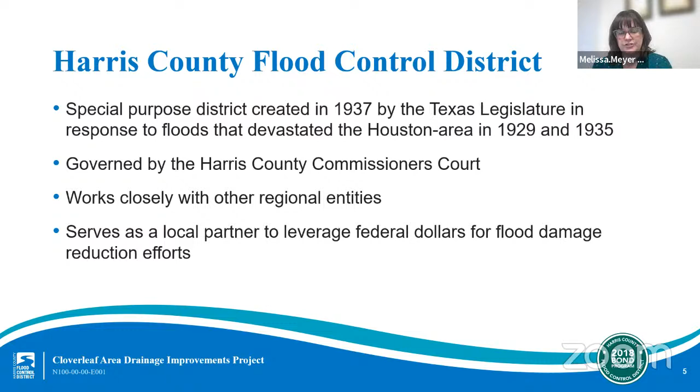The mission of the Harris County Flood Control District is to provide flood damage reduction projects that work with appropriate regard for community and natural values. One of the most difficult challenges we face is constructing effective projects that are sensitive to community and natural values in highly urbanized areas.

Harris County includes 23 main watersheds, each totaling approximately 1,800 square miles, with more than 2,500 linear miles of channel combined—approximately the distance from New York to California. A watershed is a geographical region of land that drains to a common channel or outlet, and each watershed has its own unique characteristics and needs. The project we are presenting on tonight is in the Carpenter's Bayou watershed, located in the eastern part of Harris County.

Harris County and our surrounding area is flood prone for a number of reasons. Namely, we experience extreme rainfall events, including tropical storms and hurricanes. Our area is largely made up of flat, slow draining lands, and we see large concentrations of clay soils that do not soak up excess rainfall quickly.

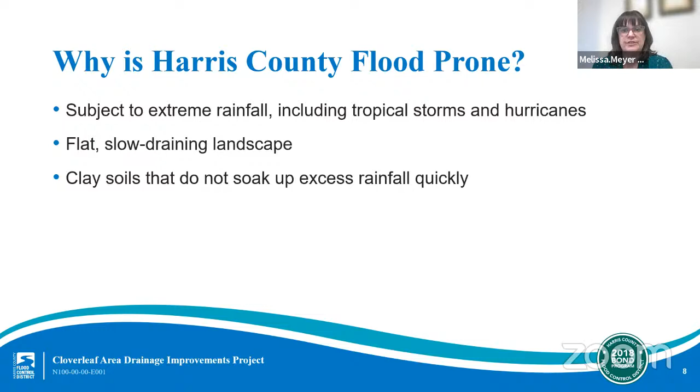While the Flood Control District plays a critical role in flood risk reduction, we are one of several entities involved in these efforts in our region. When rain falls on your roof, it flows through several jurisdictions, such as streets and drains managed by the Harris County Engineering Department, a municipal utility district, or a city such as the City of Houston, before it flows into a larger channel, creek, or bayou that the Flood Control District owns and maintains. This slide illustrates the various jurisdictions, which sometimes we even share with other entities.

Inside neighborhoods, as shown on the left side of this illustration, storm sewers and roadside ditches collect stormwater runoff and start the process of moving it away from homes and streets. Storm sewers and roadside ditches are usually the responsibility of the local municipality. The project we are presenting on tonight, however, does blur these jurisdictional lines, as a flood control district typically does not design projects for local drainage improvements. The larger bayous and channels that take the collected stormwater and move it through our drainage system to Galveston Bay are the responsibility of the Flood Control District, shown on the right side of the illustration.

In the middle is a stormwater detention basin, sometimes constructed by the Flood Control District. When storm sewers on the left are increased, this creates an increase in runoff. Since it's our policy to avoid any adverse impacts from our projects, detention basins help to safely take in and temporarily store excess stormwater during heavy rain events. Often we partner with Harris County precincts, utility districts, and others to add recreational amenities such as trails to these basins and along our channels.

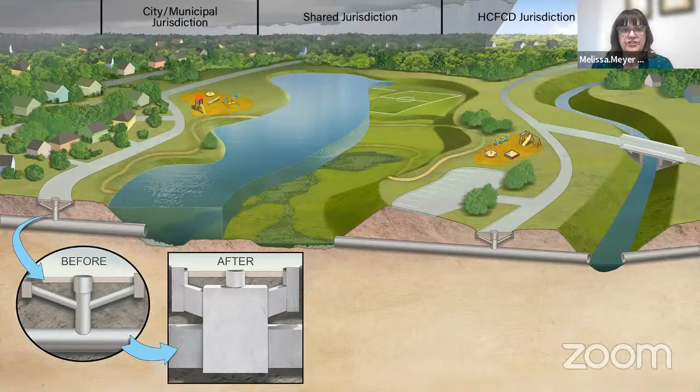On August 25th, 2018, Harris County voters approved $2.5 billion in bonds for flood risk reduction projects. This vote followed a series of 23 meetings with community members across Harris County, one per watershed, which resulted in a list of what is now 181 bond projects. 38 of those projects were added directly as a result of community input.

The actual timing of each individual project will depend on a variety of factors, including environmental permitting, right-of-way acquisition, and utility relocation, and in some cases, requirements of a particular grant. Project lists and projected schedules are updated regularly on our website.

As projects move forward, we're making significant progress towards resilience in Harris County. We shared an update with Harris County Commissioners Court in January of this year, and we highlighted a few notable stats. We've completed or closed 27 projects. We've secured $1.43 billion in partnership funding to stretch the bond funds even further for our community, and we've hosted more than 180 community engagement meetings. Your input is critical to our efforts, and we want to ensure our conversations continue. We'll continue these biannual updates moving forward to share progress on the program.

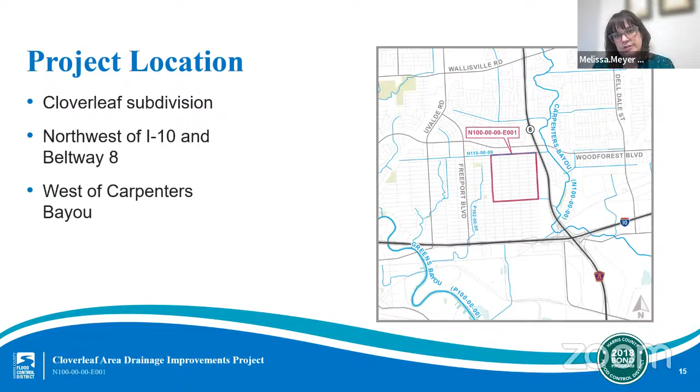Now let's take a look at the location of this flood risk reduction project. The Cloverleaf Area Drainage Improvements Project is located in the northern portion of the Cloverleaf subdivision in the Carpenters Bayou watershed. The neighborhood is located northwest of the intersection of Interstate 10 with Beltway 8, just west of Carpenter's Bayou. The Flood Control District formally identifies Carpenter's Bayou as Unit N100-00-00. The bayou flows under the Beltway before turning back to the east, where it eventually drains into the Houston Ship Channel.

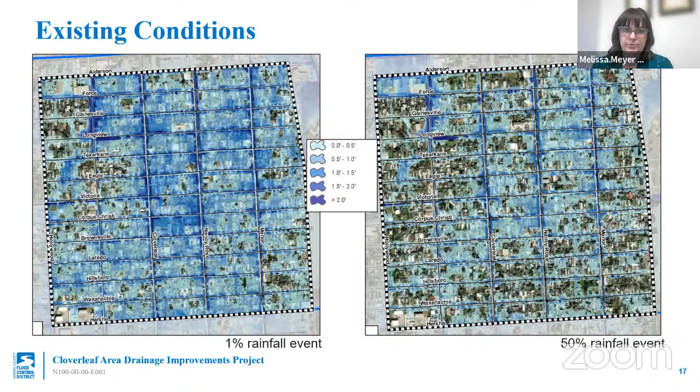We talked about how stormwater flows within the project area and why the area has an increased flood risk. The map on the left shows existing conditions for 1% rainfall events. In that size of a rainfall event, which is 18 inches in 24 hours, it is modeled that there would be 205 acres of inundation with 209 flooded structures and 7.4 miles of flooded roadway. The map on the right shows existing conditions for 50% rainfall events. In that size of a rain event, which is 5.3 inches in 24 hours, it is modeled that there would be 137 acres of inundation with 44 flooded structures and 3.2 miles of flooded roadway.

We've been working on a plan to help reduce the risk of flooding in the Cloverleaf neighborhood. In this presentation, I'll first tell you about the plan as a whole, and then I'll explain how the project is expected to be implemented in 2 phases.

The full Cloverleaf area drainage improvement project would improve some of the internal drainage systems and related infrastructure that conveys stormwater from the Cloverleaf subdivision to Carpenter's Bayou. To do that, certain roadside ditches and driveway culverts in the neighborhood will be desilted, regraded, and/or resized to increase their capacity to carry stormwater out of the neighborhood.

In addition to the improvements to the neighborhood ditches, the full project includes the construction of an underground drainage culvert designed to convey stormwater out of the neighborhood. Inlets within the ditches along the location of the box culvert would capture stormwater runoff from the Cloverleaf area and convey it more quickly out of the neighborhood.

Improvements to the roadside drainage ditches ultimately will be made in the northern part of the neighborhood, within the area bounded by Alderson Street to the north, Hershe Street to the south, Hollywood Street to the west, and Sam Houston Tollway to the east. The proposed recommendation for improving drainage conditions within Cloverleaf involves the rehabilitation and subsequent improvement of Nancy Rose Street as a primary drainage corridor.

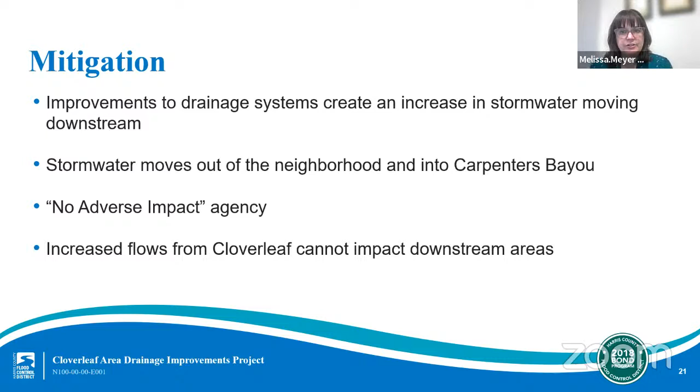To offset the impact of drainage improvements and increased flows, we need to mitigate for the improvements. One way to provide mitigation for drainage improvements is to build a stormwater detention basin, which provides temporary storage for excess stormwater during heavy rain events.

When the stormwater levels within the channels recede, the stored stormwater in the detention basin drains back into the channel by gravity via outfall pipes appropriately sized to drain the basin safely.

When we talk about stormwater detention basins, we talk about how much stormwater they can hold in a unit of measure called acre feet. That measure refers to the volume of 1 foot deep over 1 acre. For context, 1 acre foot equals 325,851 gallons. Think of 1 football field covered with 1 foot of water.

To mitigate for the drainage improvements in this project, a stormwater detention basin with a minimum storage capacity of 113 acre feet would be required to avoid impacts of the increased flow into Carpenter's Bayou. Property acquisition would therefore be required in order to build a stormwater detention basin large enough to mitigate for the local drainage improvements.

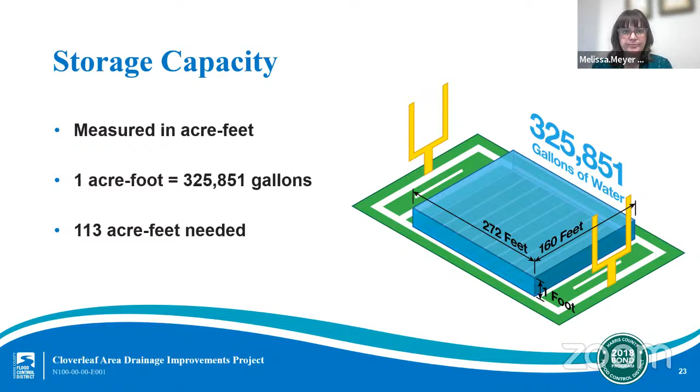Stormwater detention basins are the flood control district's typical approach to mitigation. However, in some instances where land is not available to the flood control district to construct a stormwater detention basin of an appropriate size, engineers consider alternative mitigation options. At this time, engineers are still in the process of determining a viable and appropriate mitigation option for this drainage improvements project.

I mentioned earlier that this project is expected to be completed in 2 phases, and that's partly due to the timing needed to continue investigation into mitigation and potentially for property acquisition if a stormwater detention basin is to be constructed. With the phased approach, drainage work on some of the streets in the area can be done simultaneously with the property acquisition process or further mitigation analysis. The plan would be for the drainage work on the remaining streets in the project area to be done after the construction of the stormwater detention basin or identification of other appropriate mitigation.

The project team conducted a hydraulics and hydrology analysis to determine which roadside ditches and driveway culverts in the neighborhood can be desilted, regraded, and/or resized without creating an adverse impact. By adverse impact, we mean moving the problem elsewhere or making an issue worse elsewhere. That is, what drainage work can be done without the mitigation element in place.

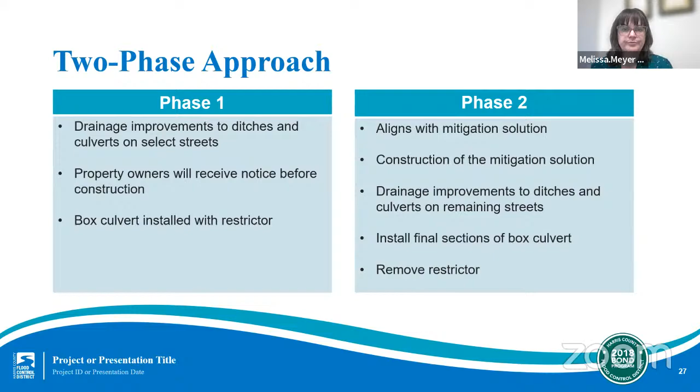Here are the expected benefits by the numbers. For the 1% rainfall event, which is 18 inches in 24 hours, it is modeled that there would be 186 acres of inundation, a reduction of 19 acres; 134 flooded structures, a reduction of 75 structures; and 6.08 miles of flooded roadway, a reduction of 1.32 miles of roadway inundation.

For the 50% rainfall event, which is 5.3 inches in 24 hours, it is modeled that there would be 62 acres of inundation, a reduction of 75 acres; 3 flooded structures, a reduction of 41 structures; and 0.57 miles of flooded roadway, a reduction of 2.63 miles of roadway inundation.

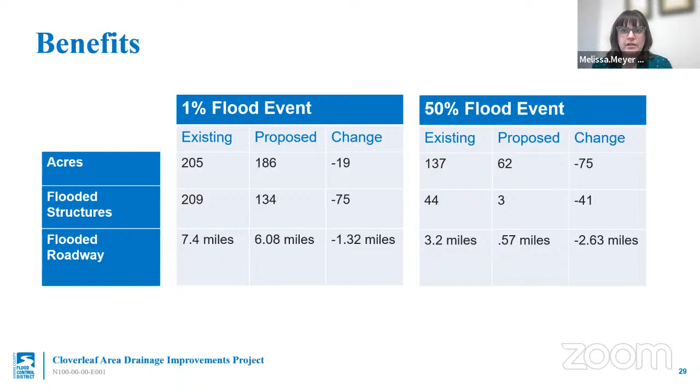So what's next? As we've stated, property acquisition in support of this project could be necessary. However, home buyouts are not a consideration at this time. The project went to bid in late March, and construction of phase 1 is expected to begin in fall of 2023 and is expected to last about 12 months. As details of the construction plan become available, we'll share that information with the community, including details on timing, sequencing, and traffic control plans as appropriate. Phase 2 would be expected to begin after completion of analysis and determination of a mitigation solution.

The Community Development Block Grant funding requires the work to be complete in June of 2024. Therefore, we will complete as many of the components of the project as possible to adhere to this schedule. We'll continue to update the project webpage.

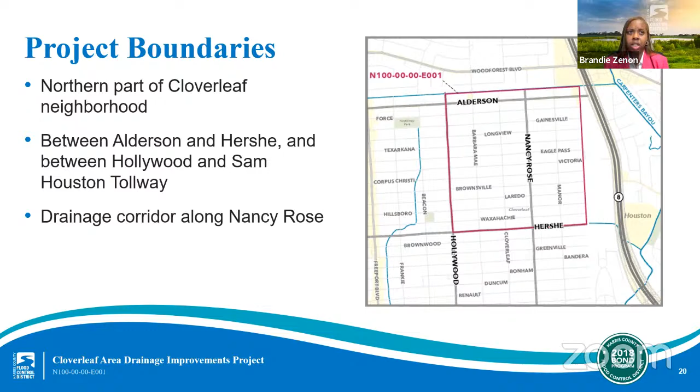The drainage in this area primarily consists of roadside ditches, roadway culverts, and driveway culverts. There are only a few storm sewers in the project area. The majority of the stormwater is collected and moves through the roadside ditches into Carpenter's Bayou. Over time, the capacity of these roadside ditches is reduced as they become overgrown and filled with silt and sediment.

In addition, older infrastructure was built in the 60s, 70s, and 80s, and was designed to the standards at that time. Over time, the intensity and duration of rainfall in our region has increased significantly in past decades. Aging infrastructure simply cannot accommodate the adequate drainage that's needed for this neighborhood.

Thank you, Brandie. Melissa, we have an education opportunity here. Can you please define what sheet flow means? Sure. So due to the flat terrain in our region and the design of the older street networks, when there's an intense rainfall, older storm sewer systems may not contain all of the rainwater draining into them.

So rainfall not being contained in a storm sewer system may overflow into the streets. Streets sometimes serve as above-ground channels, which convey stormwater as it sheet flows to the nearby channels.

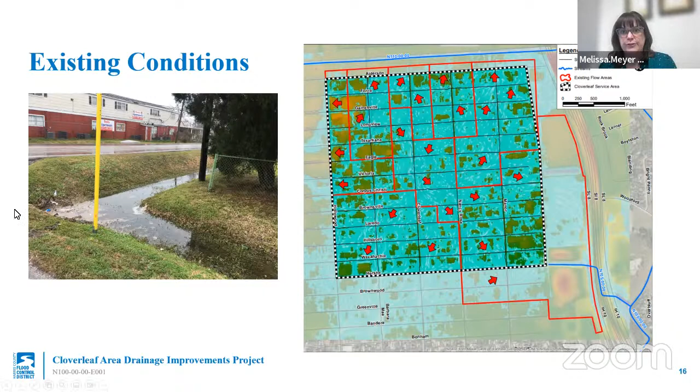As Brandie mentioned earlier, a lot of the existing aging infrastructure is filled with sediments, and so there's no way for the rain to go. Basically it just sheet flows to wherever it can get. That's the main issue out in this area that we're trying to solve.

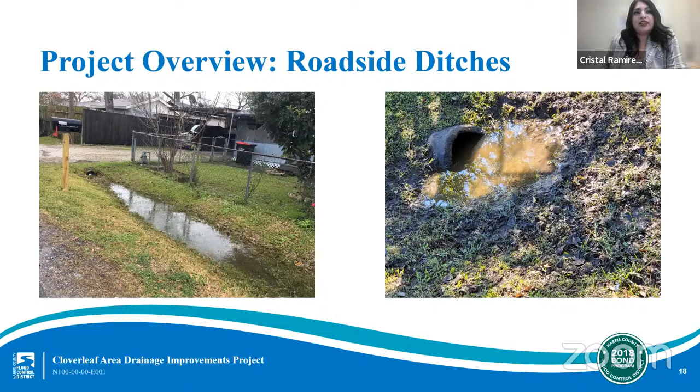Melissa, I know folks are curious about property acquisition. Will there be any property acquisition needed? So it's too soon to say until the investigation is complete. At this time, home buyouts are not a consideration. Property acquisition in support of this project could be necessary, and it'll depend on the identification of the most effective options for mitigation for the local drainage improvements. We'll know more about potential property acquisition during phase 2 of this project.

Thank you. Brandy, this is probably one of the most important questions viewers will have tonight. How will construction of the phase 1 drainage improvements impact residents? Good question. As with any construction project, there may be construction inconveniences within the area to the residents. Property owners will receive advance notice as to when the contractor or construction will begin within the area and which streets will be impacted.

At this time, it's too early to tell exactly what the details of the construction plan are. But once we have that information available, we will publish it and provide it to the community. This communication could include details on timing, sequencing, traffic control plans, and access to property as appropriate. Construction of the entire phase 1 is expected to last approximately 12 months, and we will implement a sequenced timeline, meaning interruption on an individual street will not occur the entire time.

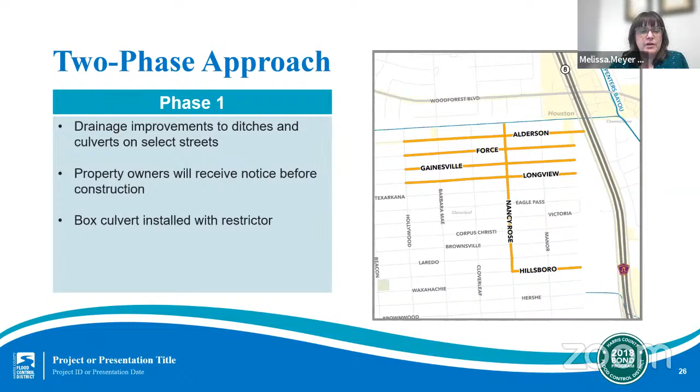Thank you, Brandie. Melissa, you mentioned that the box culvert constructed in phase 1 will have a restrictor in place. What is a restrictor? A restrictor simply limits the amount of stormwater that will be allowed to flow into the box culvert and then ultimately drain into Carpenter's Bayou. Because the project ultimately requires appropriate mitigation for increased flow into Carpenter's Bayou, we'll need to limit that flow until the mitigation is in place. We can't move more stormwater into Carpenter's Bayou than it can handle without creating an adverse impact downstream. Therefore, the capacity of the box culvert will be temporarily limited.

The box culvert will still be functional after the completion of phase 1 improvements and will still accept stormwater from the improved roadside drainage systems.

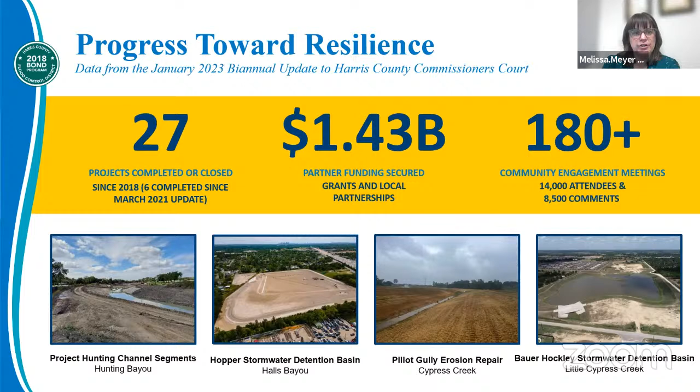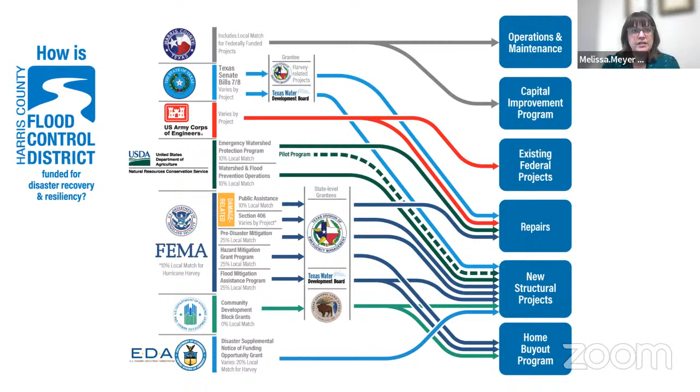Melissa, how is this project being funded? How much will it cost? This project is an example of partnership funding between the 2018 bond program, which funded the Carpenter's Bayou Watershed Planning Study, and the resulting 2021 Carpenter's Bayou Watershed Plan, and the U.S. Department of Housing and Urban Development Community Development Block Grant Mitigation Program, which awarded a $9.4 million grant for phase 1 of this project. Additional funding will be required for phase 2 of the project.

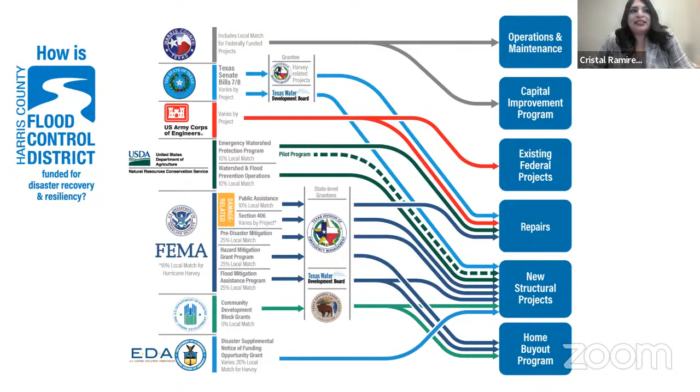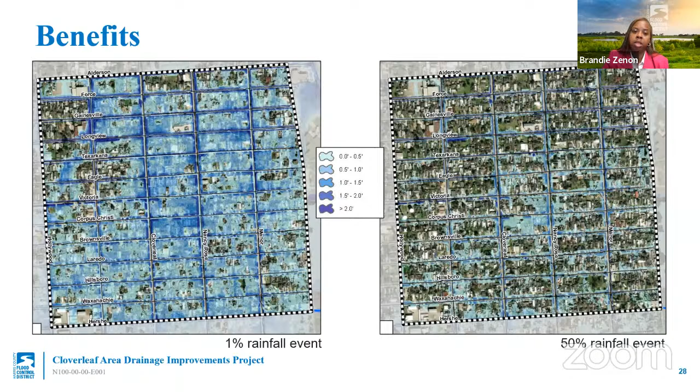Thank you, Melissa. Brandie, can you explain the benefits expected from the recommended improvements? Yes, after the completion of phase 1 of the project, we expect to see reductions in flooding and flooded structures in the phase 1 and 2 area. For the 1% rainfall event, where 18 inches of rainfall falls in 24 hours, we expect a reduction of 19 acres of inundation, 75 fewer flooded structures, as well as 1.32 miles of flooded roadway removed.

For the 50% rainfall event, where 5.3 inches of rain falls within 24 hours, we expect a reduction of 75 acres of inundation, 41 fewer flooded structures, and a reduction of flooding on 2.63 miles of roadway.

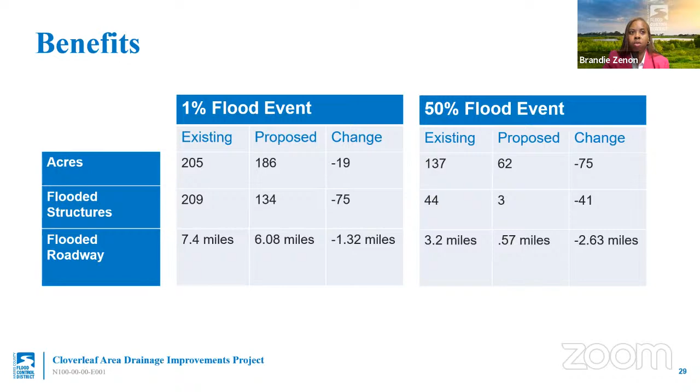Thank you. Again, I know many of you are curious about your impacts, Brandie. How can residents find out if their home will be included in the improvements? The streets included in phase 1 are Alderson Street, Force Street, Gainesville Street, Longview Street. We are doing improvements along Nancy Rose as well as Hillsboro. The impacted property owners will receive advance notice as to when construction will occur on their particular street, along with details of the timing, sequence, traffic control plans, and how they will be able to access their property.

Thank you. Brandie, this is also for you. Is this the first time the community has heard about this project?

Through the process required for the Community Development Block Grant MIT, or CDBG-MIT funding, a public meeting was held in the Carpenters Bayou watershed in 2020. Tonight's meeting is the first time we've specifically talked about the Cloverleaf Drainage Improvements Project. Until now, updated project information has been posted on our website, which we will continue to make available for the community to look at additional information about the project as needed.

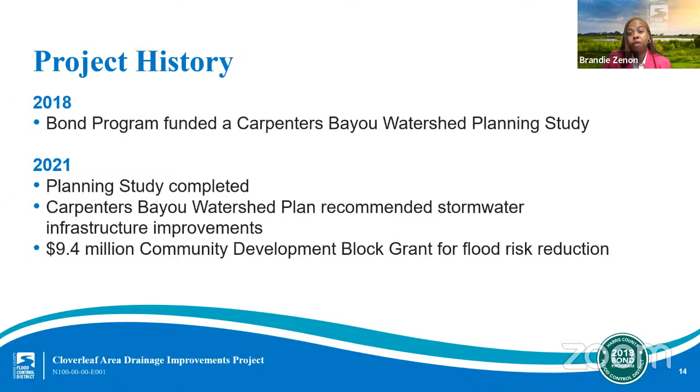Additionally, the Flood Control District always welcomes input on their projects. You can make that input at www.hcfcd.org/Cloverleaf. Just click submit a comment to ask a question or provide project input, and someone from our team will get back with you for a response.

Once the details for phase 2 are known, the Flood Control District will hold another community engagement meeting like this one to discuss the alternatives that were considered and what would be the recommended alternative to move forward for construction of phase 2. Thank you, Brandie.

I have another question for you, Brandie. What is the current stage of the project? For phase 1, we are currently entering into the construction phase. We just completed design earlier this year, and we're transitioning into the construction phase. For phase 2, we are kicking off the design phase for that part of the project.

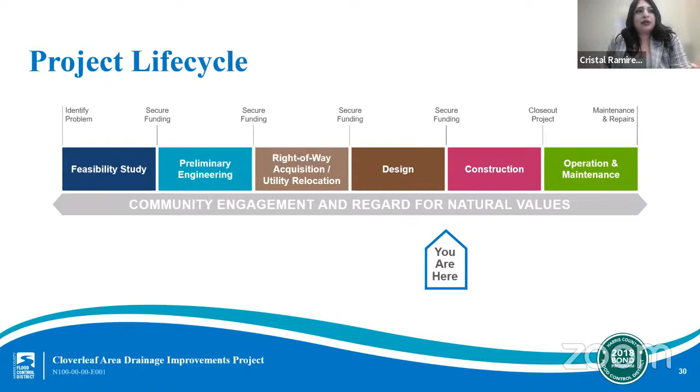Thank you, and Brandy, this is for you as well. How long will it take to construct this project? For phase 1, we're estimating the project will take approximately 12 months to complete, which aligns with the deadlines set for the grant funding we receive. We expect construction to start later this year, fall of this year. For phase 2, it's too soon to determine how long construction will last, but that information will be made available by the next community engagement meeting.

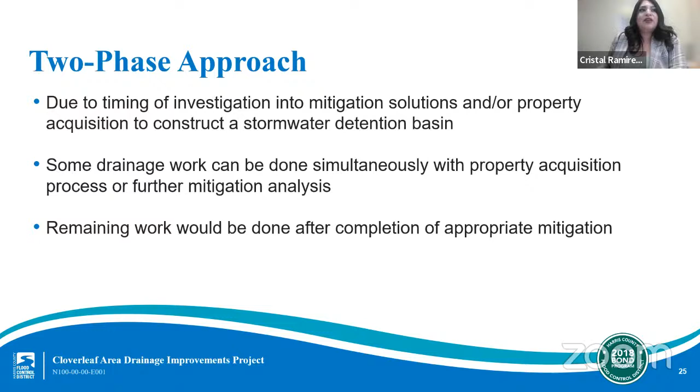Thank you. Melissa, this is always a concern for Harris County residents. Will this project eliminate flooding in this area? It's impossible to say that any one project will completely end flooding in an area. While the project will reduce the risk of flooding in the area, the risk of flooding will remain. The Flood Control District recommends that everyone in Harris County and surrounding areas have flood insurance to insure against the possibility of personal and financial loss.

You can visit hcfcd.org/MAAPNEXT to learn about the Flood Control District's MAAPnext initiative, which aims to produce Harris County's most comprehensive and complete set of flood hazard maps and information.

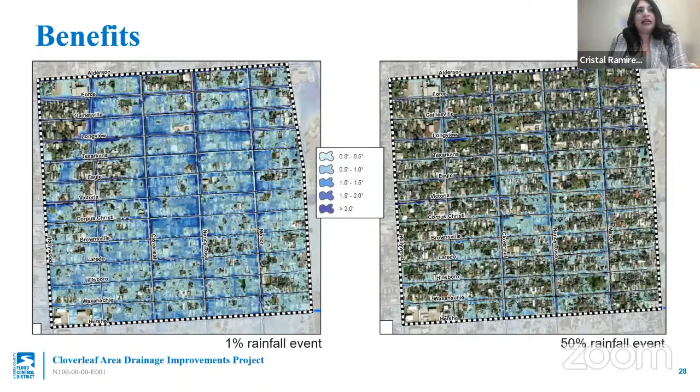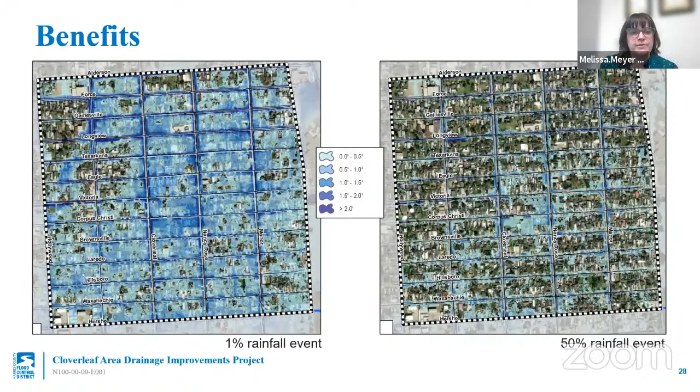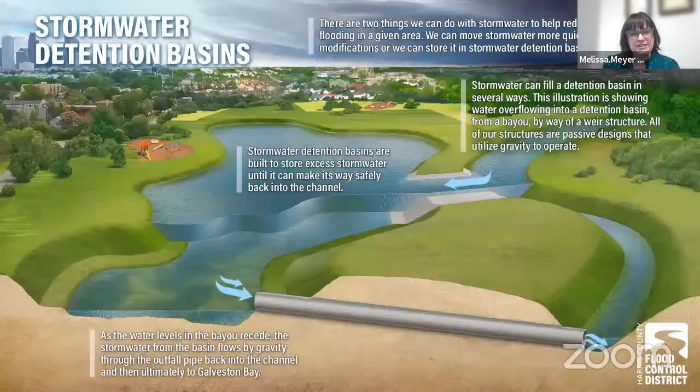Thank you. Melissa, you mentioned that we are a no impact agency. Can you explain what this means? The Flood Control District is a no adverse impact agency. Project engineers must ensure that improvements made on one part of the watershed or channel will not increase flooding in another part of the watershed or channel. All new development within Harris County must comply with strict requirements for detention. Development criteria has been in place for the last 30 years and is always required for any development in the county. These criteria require that all new developments mitigate for flooding and drainage impacts that might be caused as a result of the development.

Thank you. Melissa, while we have you, can you explain how this project fits into the overall 2018 bond program? Sure. The Flood Control District's mission is to provide flood damage reduction projects that work with appropriate regard for community and natural values. The 2018 bond program funded the Carpenters Bayou Watershed Planning Study, which resulted in the 2021 Carpenters Bayou Watershed Plan. That plan made recommendations for major stormwater infrastructure improvements, such as the ones included in this project. The bond funding, in conjunction with partnership funding from the U.S. Department of Housing and Urban Development Community Development Block Grant Mitigation Program, work together for this project to reduce flooding risks to Harris County homes and communities.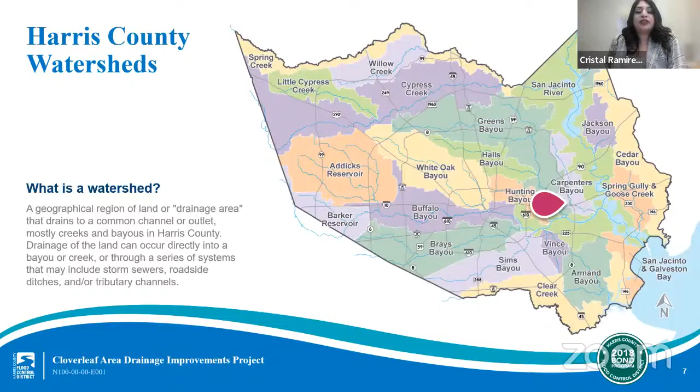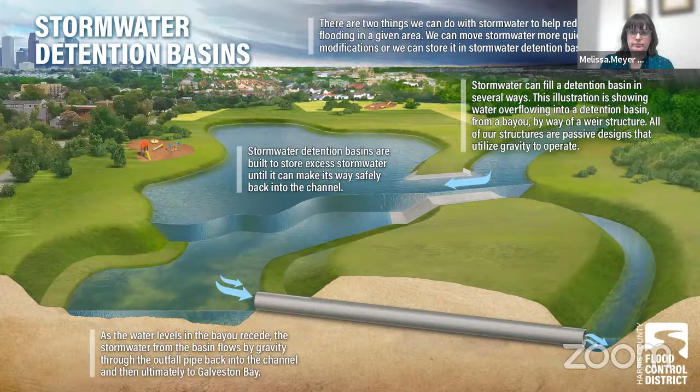This question is also for you. You say a stormwater detention basin is the Flood Control District's typical mitigation solution, but what is a stormwater detention basin? A stormwater detention basin provides temporary storage for excess stormwater during heavy rain events. When stormwater levels within the channel recede, the stored stormwater in the detention basin drains back into the channel by gravity via outfall pipes that are appropriately sized to drain the basin safely. We measure the volume of a stormwater basin in acre feet, which is a volume of water 1 foot deep over 1 acre. Thank you, Melissa.

Brandy, this question is for you. We mentioned the concept of mitigation a lot. What does that mean, mitigation? Mitigation is flood risk reduction projects that include channel and drainage or conveyance improvements, creating increased flow of water moving into or downstream in a channel. Think of drainage improvements here, allowing more stormwater to flow more quickly and more efficiently from the Cloverleaf streets into Carpenters Bayou. Because the Flood Control District is a no adverse impact agency, we will never take a flooding problem from one area and move it to another. To offset the improvements in this one area, we will need to mitigate for those improvements so they don't negatively impact another area or watershed. One way to mitigate for improvements is to temporarily hold the increased stormwater, such as in a stormwater detention basin, until the channel which will receive the water can do so in a way that it does not create flooding downstream.

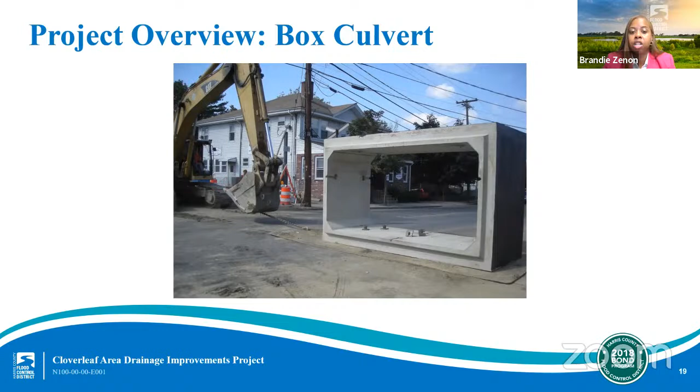Staying on this topic of mitigation, we have a question asking: if there isn't land found for the typical path of a detention basin, what happens to the project? Or is it simply too early to say at this point? Well, we're still considering mitigation solutions like it was mentioned earlier, but there are alternative solutions other than stormwater detention. As mentioned, you can do linear detention, which is within the channel itself. You could have underground storage, like was previously shown, with culvert boxes that could be sized to hold all of the increased flows for a time period before releasing the flows downstream. Another alternative is to do additional channel improvements that could store the excess water within the channel without causing impacts. But for this particular project, we are still trying to evaluate and consider all options we have and figure out the best solution for the ultimate project.

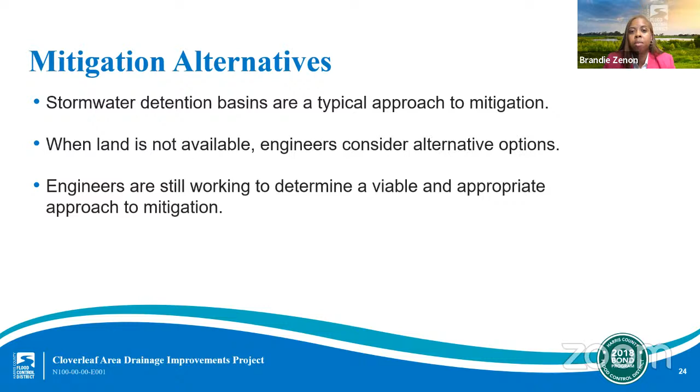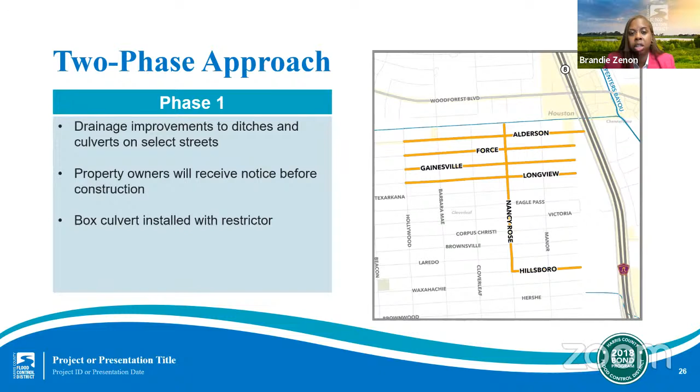Can we go ahead and pull up the street in the project area again for our viewers? And since we were just talking about mitigation, I want to reiterate that for phase one, the improvements we are moving forward with construction will not cause an impact downstream, which will not require any type of mitigation at this time.